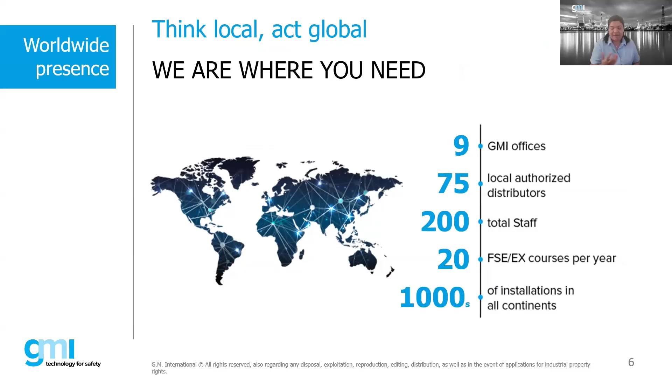On the next slide, we'll see that we're an Italian company, but we have global presence. So like Bob was mentioning, I work in the Houston office, GMI Houston, which is the headquarters for the Americas, and we have several offices as well in Asia, in the Middle East, and of course Europe, and we partner with our distributor partners such as Bob today.

Something that I find very interesting on the GMI products is all of them are being manufactured in Italy, and it is a state of the art production facility. And every single product that GMI manufactures is being tested completely before it leaves the facility. That allows us to provide you, the user, a 5-year warranty. That's something I find very interesting in the market nowadays. So we have that 5-year warranty for you guys.

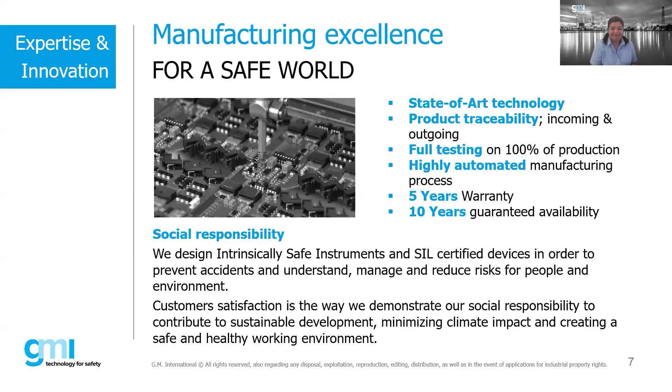As I mentioned, we are an Italian company, so we're a European company. So all our products will be ATEX and IECEx from the get-go, but we have global presence. So we also carry the North American approvals, such as UL, FM. We also carry Chinese approvals, PESO from India, Inmetro for Brazil, and of course TUV for functional safety, and many of our products will be DNV for marine applications.

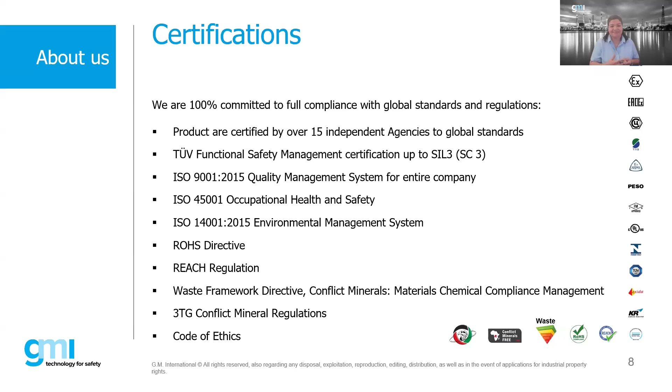Yes, and this will be the range of our products. So like I mentioned, intrinsically safe isolators, SIL 3 safety relays, SIL 3 signal conditioners, SIL 3 power supplies, I/O multiplexers, termination boards which have the connector ready for that DCS card, SIL 3 HART multiplexers, and intrinsically safe surge protectors, and our X1 series, which is a compact solution that provides also intrinsic safety or functional safety SIL 3 relays with the built-in connector for that DCS integration.

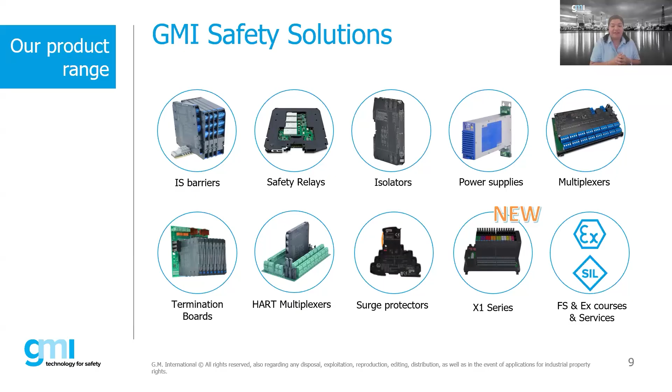We have a global range of customers going from system vendors, many EPCs, a lot of OEMs with global presence, and many end users. And we hope that soon we can collaborate with you guys, all our attendees joining today.

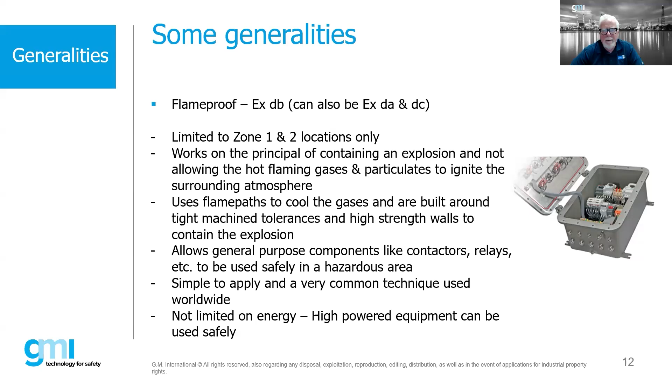But generally, zone one, zone two. Some advantages of flameproof: it's fairly simple to apply, and we can make almost any electrical component suitable for hazardous locations. It has robust construction, which could mean it's big and heavy - that could be an advantage or a disadvantage. It can be cost effective depending on the product involved.

Now there are some downsides of flameproof. As much as it's widely used, there are some negative things. One of the big issues is maintenance, with regards to things like bolts. If they do not get retightened or maintained, or they get lost, then all of a sudden our whole protection concept goes away because we have no protection if covers are loose.

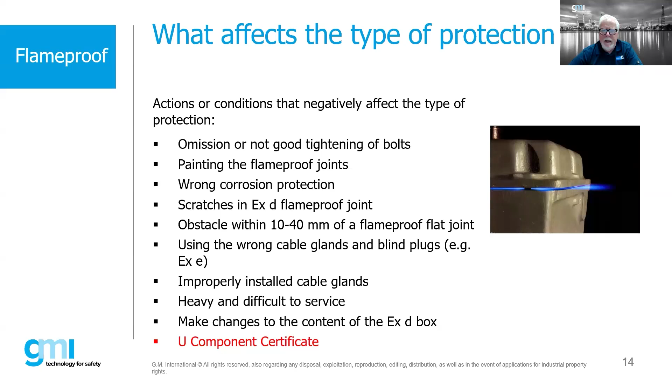If you look at some of these pictures, they can be large, heavy, very expensive. They're not necessarily the best from a corrosion resistant standpoint. If we have cast aluminum, sometimes this holds up very well, but in many cases maybe it won't. We may require the need for sealing or barrier glands, and it does require a good understanding by the maintenance team to replace and tighten bolts, relubricate threads or flange surfaces. It can also be limited for the gas groups in which you're actually putting this into.

We have a question on the chat - I think it's good timing for this one. On flameproof, is there specific nuts or bolts that need to be used, or could they be replaced with any standard bolts and nuts?

Yeah, that's a great question, and it comes up all the time. The best thing to do is check with the manufacturer. Most manufacturers will say, my bolt is an A4 stainless bolt, metric M8, or something like that. Generally speaking, as long as you're using the same material, same thread type, something with the exact same specifications, that is acceptable. I don't want to say that's acceptable across the board, but generally speaking, and we deal with a lot of different flameproof enclosure manufacturers, most of them will have that type of statement.

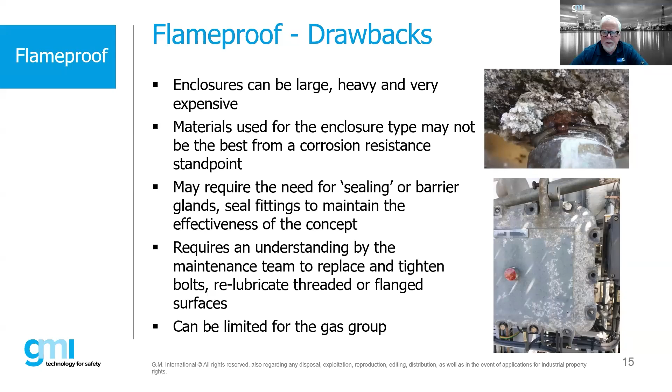Let's see if we can do this next one. So some of the other things you see with flameproof equipment - it actually does not require to be IP rated or have an ingress protection rating. So flameproof equipment can leak.

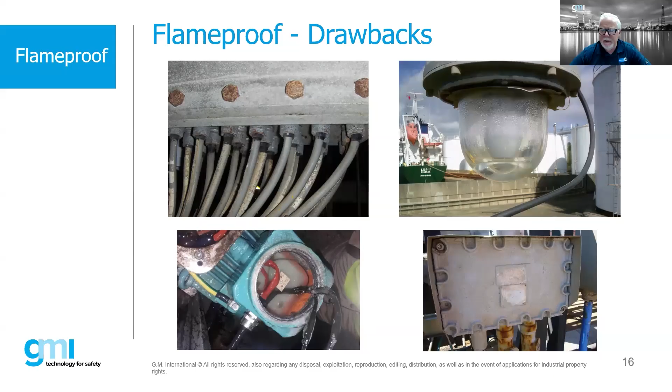Well, now we've obstructed that flange. So now we're in violation of making sure we keep a 10 to 40 mil distance between any solid obstruction and the enclosure itself. That's a dangerous situation. Obviously, missing bolts and all that is another issue too. But in the case of the light fitting, you do see some water collecting on the inside. So these are all kind of the drawbacks you see typically with flame-proof equipment.

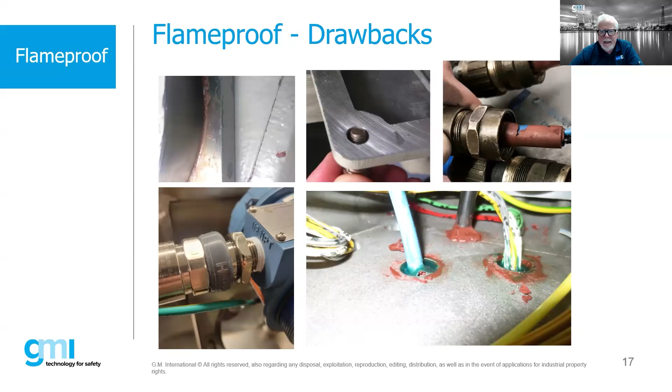Now, some generalities about intrinsic safety. Intrinsic safety is considered to be the safest protection concept out there. It's really one of only two protection concepts allowed for zone 0 - the other one is encapsulation, MA. It's been around for many years, just like flameproof, and it originally came out of the mining industry for signaling bells, where they limited the amount of energy for signaling to miners in the mines by the use of intrinsically safe barriers.

It works on the principle of limiting the energy into the hazardous area. Now, it is a system concept. This involves the use of an intrinsically safe barrier, or what we might call an associated apparatus, in conjunction with the end device and the interconnecting cables and enclosures. So this is where it gets a little more interesting, because it is a system concept, and we have to take that into account when using intrinsic safety.

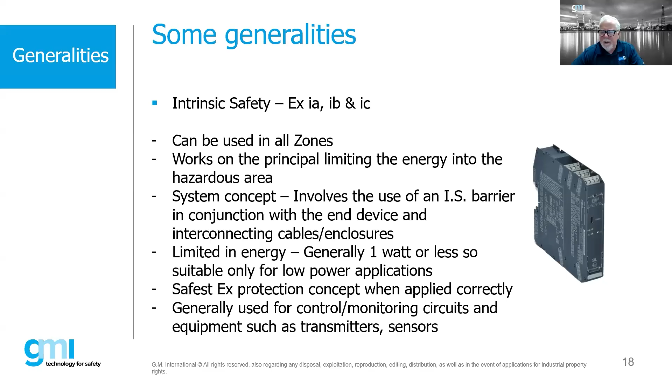Excuse me, I'm getting over a cold, I apologize. One of the other things about intrinsic safety - it is limited in energy, generally 1 watt or less. So it's suitable for low power applications. Every now and then I'll see people asking for an intrinsically safe motor starter, or an intrinsically safe circuit breaker panel - you just can't do that, right? It's generally low power, so a lot of our signals are 4 to 20 milliamp control signals. Certainly we can make those intrinsically safe, but a lot of other things we just cannot. Again, it's typically used for control and monitoring circuits and equipment, such as transmitters and sensors.

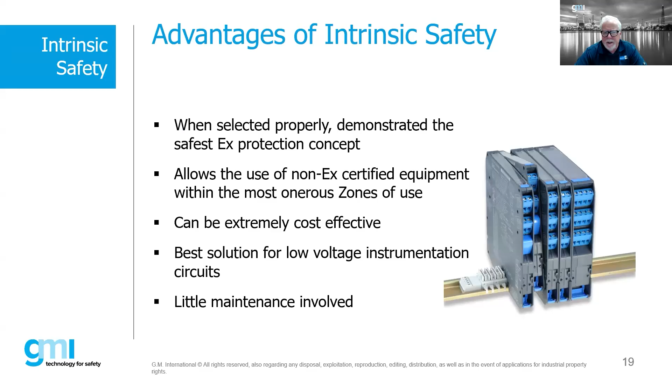When it is selected properly, intrinsic safety is demonstrated to be the safest EX protection concept. One of the big benefits is it allows the use of non-EX certified equipment within the most onerous zone of use. It can be cost effective, and it's generally the best solution for low voltage instrumentation circuits, with little maintenance involved.

So some of the drawbacks: we need to match the barrier to the device, which takes into account engineering. We need to consider the capacitance and inductance of the overall circuit, including the cable - this is one thing people sometimes forget. We have to account for the field device and associated apparatus, but also the cabling itself, and again the separation. We really cannot repair intrinsically safe barrier units - once they fail, they basically get disposed.

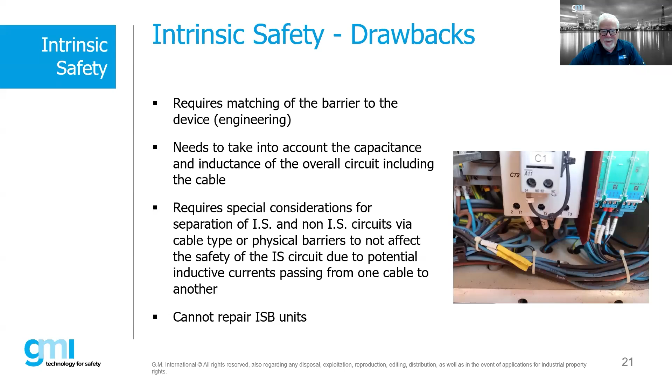However, in the case of GMI, they have a 5-year warranty. So if they fail within 5 years, then GMI will replace them. Absolutely.

So here's an example of bypassing barriers. We have some barriers, and what probably happened is maybe the fuse blew on these barriers. And of course, if the fuse blows, then there's no signal. The guys in the field need to go ahead and get this running. What do they do? They just bypass it. And at that point, we've created a very dangerous situation because we have no protection in a potential hazardous area.

What you see on the right-hand side is bundling between IS and non-IS. We could have a situation where inductive currents - capacitance or inductance - are induced into the intrinsically safe circuits. This is something we really have to be very careful about.

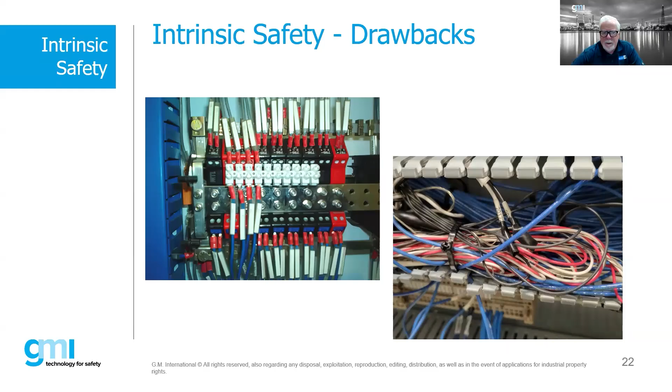But if they don't pass, then we can go back to the drawing board. We are creating a system, an intrinsically safe system - you have your intrinsically safe field device, your intrinsically safe isolator barrier or Zener barrier, and the wire in between, which is part of this calculation to create this system that will be installed. Some calculation needs to be done to make sure your system will have this energy limitation, and it will allow you some of the great advantages of maintenance for the intrinsic safety system.

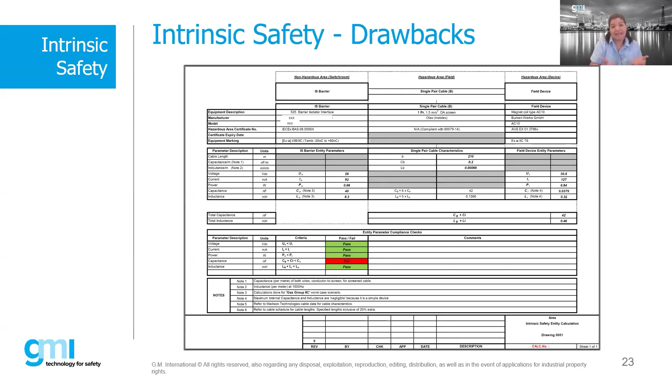And I think also for maintenance, right? Like a plant that has been running with IS for 20 years, maybe they need to replace that IS device, and that device doesn't exist anymore. So now they reach out to different manufacturers. Well, this information allows us to provide a safe recommendation on what to put in place.

Absolutely, yeah, because obviously manufacturers discontinue products. Again, as an inspector on an ongoing project, what I'm going to be looking at when I'm an inspector looking at intrinsically safe systems, I want to see this information and then I want to go validate. I'm not going to double check all the numbers, but I am going to say, hey, does that equipment that's out there match what's actually on this? Is the field device, in this case, that particular brand of product? Is this the particular associated apparatus? Is that all correct? So if we decide we can't get this product anymore and we want to modify it or change it, then that's okay.

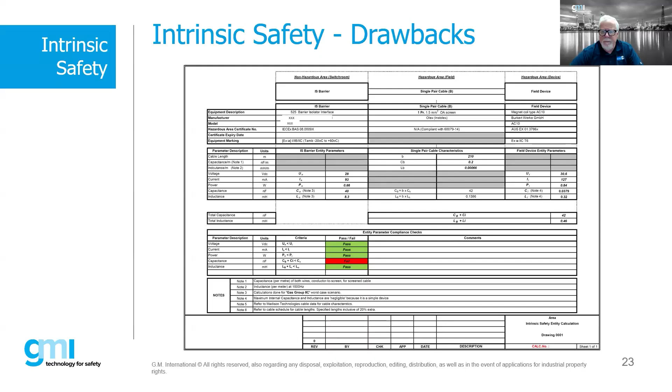Then all we need to do is just update our DSD and we go on down the road. So this should be a living, breathing document that stays with that intrinsically safe loop for the life of the installation. Could be 30, 40 years. So it's something that is important to have, where this is how we validate that intrinsically safe installation.

And we have a question from our attendees.

It says, for design teams, it's a bit challenging to select the right type of IS barrier and get the information to be added. For this, manufacturers like GMI and many others, we want to partner with you to help on the safe selection of these devices. So you just reach out to us, reach out to partners like Source IEX, distributor partners for this type of applications, and that's what we like doing, right? Give us the application, and then we can work together to see which product makes more sense for the application.

Because just like the attendee was saying, there are several different barriers. Which one do you select? There might be five different options that will work, but it really depends on the application, on what you want to achieve, that will help us guide you towards one versus the other. So definitely partner with us, partner with IS specialists for that type of support.

Yeah, absolutely. And it can get confusing. A lot of times what manufacturers of end devices do, if you look in a Rosemount catalog or something like that, and you look at their installation operation manual, in the very back they'll actually give you a specific brand or manufacturer. That doesn't mean you couldn't use another brand or manufacturer. It just means they've done the research to do some calculations and said, hey, if you use this brand, this manufacturer's product, this one will work. If you use this one, so forth and so on. A lot of times that's pretty common.

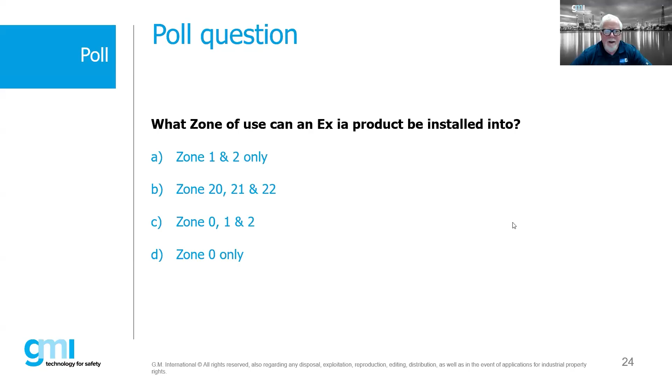So was it C? It was zone 0, 1, and 2? That was the most correct answer. And zone 1 and 2 is correct. Zone 20, 21, and 22 are dust hazards - intrinsic safety can be used in those, it's just not as common. So really the only one that's wrong is the fourth one, zone 0 only, because if a protection concept is suitable for the most onerous zone, by default it's good for lesser zones as well. So in that case, the correct answer would be C.

I would have put C and B if I was allowed to do two options. No worries. So what standards provide the guidance for the use of flameproof or intrinsic safety?

So the installation design standard for those in the IEC world is within the Dash 14 standard. Complex IS circuits are located in the Dash 25 standard. Within the US, we follow the NFPA 70, commonly referred to as the National Electric Code, and that's all in Article 504. In Canada, we follow the CSA C22.1 Part 1, Section 18.

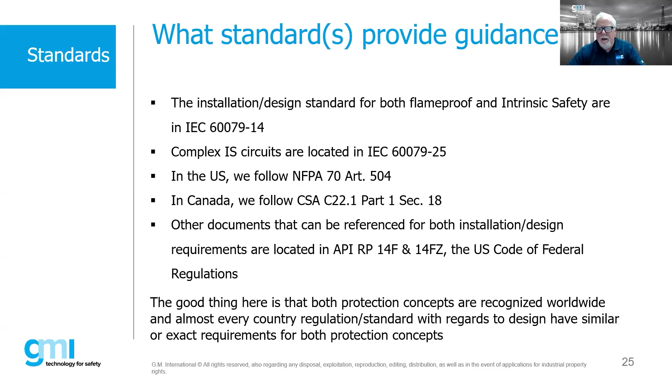There are also other documents you can find for installation design, such as American Petroleum Institute recommended practices, or the US Code of Federal Regulations, or some of the other international standards out there. The good thing is that both of these protection concepts are pretty much recognized worldwide, and almost every country's regulation with regards to design has similar or exact requirements for these two protection concepts. So if you're familiar with intrinsic safety in Europe and you want to apply it in, say, Latin America, guess what - it's pretty much the same. We want to do it in the United States - well, we're slightly different because we have the division concept, but if we use the zone concept, then it's pretty much the same. Almost everywhere else in the world, the concepts for flameproof and intrinsic safety are very, very similar no matter where you go.

And we see that a lot with our OEM customers, right? Taking advantage of that one design they can utilize in pretty much any part of the world because they can triple certify it, or quad certify an assembly.

So really then it boils down to, okay, well what about the cost of ownership? And of course there's the financial outlay. Again, there are certain applications where we can only use flameproof, certain applications where intrinsic safety makes sense, and certain applications where we can do either one.

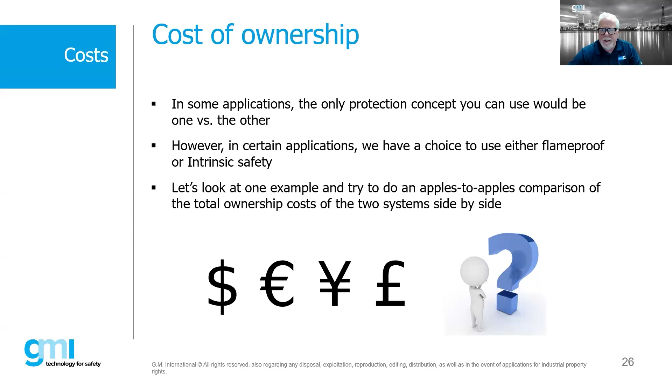So just picking out a simple example here, looking at the cost of doing, say, a transmitter. In this case, we've got a flameproof transmitter - let's just say this transmitter is $400. It's probably a lot more, but if we use $400 as a basis in US dollars, then generally we might have to use a barrier gland, possibly not. A barrier gland is a compound type gland. Depending on the cable type, the cable length, and where we are in the world, we may not need to use a barrier gland.

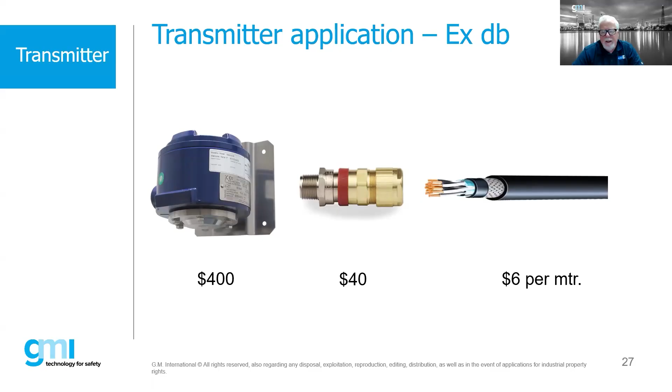But if we just assume we do, we're going to use, say, an armored cable, a braided marine type cable, or maybe a steel wired armor cable. This is kind of what we'd be expecting for the cost of a traditional flameproof type installation. Now, if we do the exact same thing but instead of flameproof, we do this as intrinsic safety...

Well, again, the transmitter is going to be basically the same cost. Really, the difference in cost now is going to be with the gland, the cable, and certainly the associated apparatus. So depending on the length of cable, depending on how many loops there are, this can be a fairly cost-effective solution, but it really just depends on how many loops you have and how much cable. Cable is going to probably be the major factor why one installation could be less expensive than the other.

Because when we start running with IS cables, now all of a sudden the cable requirements may not require us to use an armored cable. And then even in many cases, the glands that we use for intrinsic safety, in some cases, they don't even need to be certified. So there can be some significant cost savings in going with an intrinsically safe installation versus flameproof.

And what makes it interesting is that you will find that manufacturers now are making a lot of their devices, such as transmitters, marked both for EXD and for EXI. So you have the choice—it's up to you how you want to install this. And it's really important too to make sure that if you're doing it one way or another, the people doing the installation understand how you're doing it.

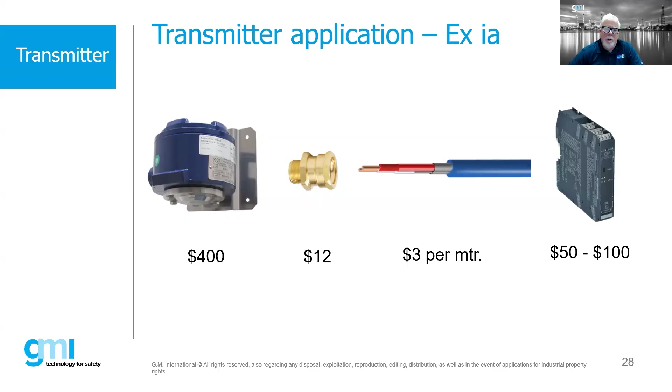So again, material cost for the transmitter is the same. Cables and cable gland would be generally less, but we need to include the cost of the ISB. Generally, the longer the cable run, the more cost effective it can be.

Maintenance cost: all EX installations shall be inspected once every 3 years. Flameproof may require de-isolation before opening enclosure if a full detailed inspection is required. IS loops can be worked on while energized. However, that being said, many plants and organizations do not allow IS to be worked on while energized, but the standards generally do allow you to do that.

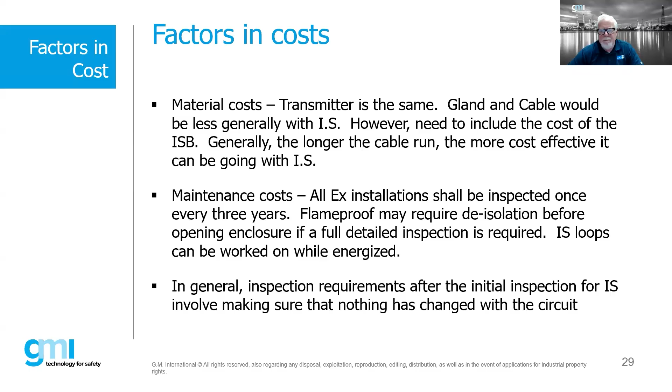So the key thing on intrinsic safety is that after that initial detailed inspection is done, if it has been done and everything has been selected correctly, the only real inspection we're doing is making sure that nothing has changed. That's really the key thing—making sure the environment is not degrading, say, the cable, the transmitter, or whatever it is. So generally speaking, from a maintenance and inspection standpoint on intrinsic safety, it's a fairly simple, quick process, just making sure it matches what was originally done.

I think we have another poll question here, Barb. Yes, we see it. Intrinsic. I see, let me find it here.

While you're doing that, we had a question regarding EXD cable glands: is it correct to use a barrier gland until 3 meters of cable distance? Beyond 3 meters, can I use a normal armored or non-armored cable gland, for example?

Yes, to an extent, yes. The edition of IEC 60079-14 from 2013 had this 3 meter rule, where basically going into a flameproof box, if the cable was circular, compact, had extruded bedding, and would basically not allow gases or vapors to travel in between the cores, then we could avoid using a barrier gland if the cable run was longer than 3 meters.

Now, that standard has just recently changed and it's been introduced, I think it was October of this year or last year, as Edition 6. And that 3 meter rule has changed. So we'll probably talk about that sometime in one of these webinars, but there's a new cable gland selection chart for EXD, or actually primarily for barrier glands where you need to use barrier glands, and it's not the 3 meter rule anymore.

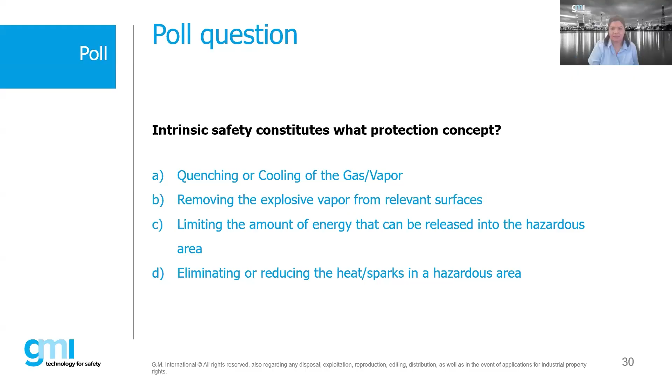Good, okay, so our attendee has responded. I think they did pretty good. Limiting the amount of energy that can be released - there you go. Yeah, so quenching or cooling of the gas vapor, that's flame proof. Removing the explosive vapor from relevant surface, that's a pressurization concept. Eliminating or reducing the heat or sparks in a hazardous area, that's considered to be increased safety. So limiting the amount of energy is the concept.

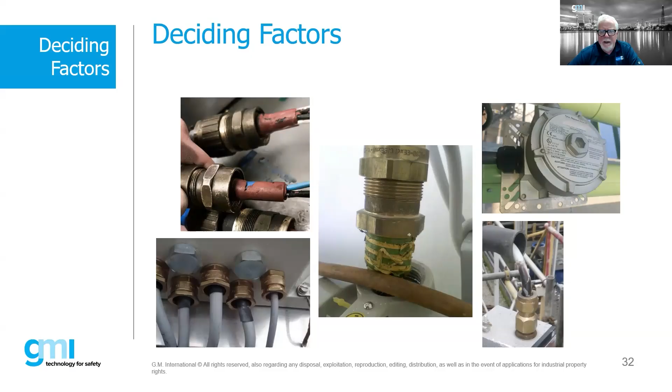So again, some of the deciding factors - cabling and cable glanding can be a big issue. I don't want to minimize - you don't always have to use barrier glands, so that's not necessarily always the case, but certainly glanding seems to be a big issue with regards to any EX installation, regardless of what it is. But glands are very, very important.

Again, each concept has its advantages and disadvantages, and sometimes the advantages of one versus the other is not so clear. Each installation situation is different. It depends on the labor force and the skill of the operator, technician, and designer, because it can make a big difference of whether or not that protection concept makes sense.

One of the things - I'm working with a customer right now that's doing a project in the Middle East, and they're going to use intrinsic safety for the first time. The good thing was, from their design, a lot of their equipment were considered to be simple devices, sensors. And because they're simple devices, not energy storing, their installation and design of their packaged equipment more or less doesn't have to change, because with simple equipment with intrinsic safety, we do not necessarily have to have certified pieces of equipment - we can use general purpose equipment with intrinsic safety. So that's a big factor for them, where their design for the most part doesn't really have to change dramatically, the parts and pieces and everything else.

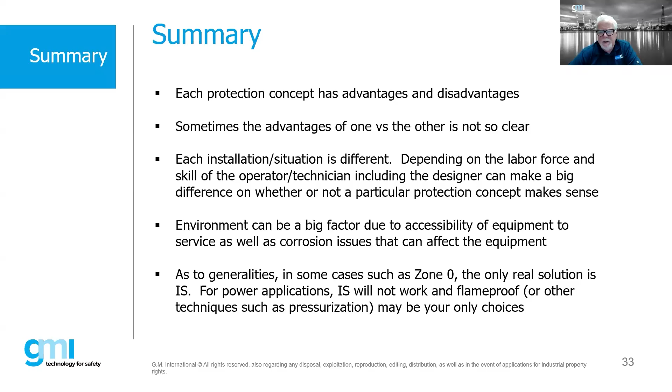So again, for some generalities, such as Zone Zero, the only real solution is intrinsic safety. And again, for power installations, IS won't work, and flameproof or pressurization or some of the other techniques may be the only choices.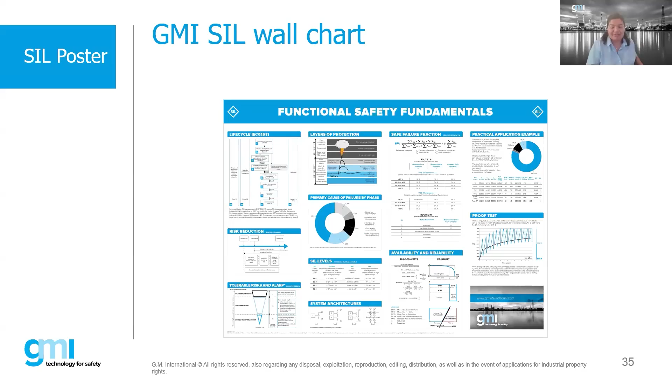Now don't leave, we're not done yet. Well, of course you can leave, but we did want to at least address some of the questions that you have brought to us.

First question: must the equipment and barriers be certified as intrinsically safe by the regulators? Yes, for the most part. However, the barriers and some of the final end devices must be certified as intrinsically safe. This is important to know: a barrier itself, the associated apparatus, is not intrinsically safe, but the output is.

So the field device may or may not need certification as being suitable for EX applications. If it is a simple device, basically a non-energy storing device such as a switch or an RTD, that device would not require EX certification. In those instances we can use general purpose equipment, including in some cases the wiring methods we'd employ for a non-hazardous application when using intrinsic safety. That's probably one of the biggest advantages of intrinsic safety: with simple, non-energy storing devices, we can follow almost the exact same installation as a general industrial application, even in the most onerous hazardous location application. That's a very big benefit.

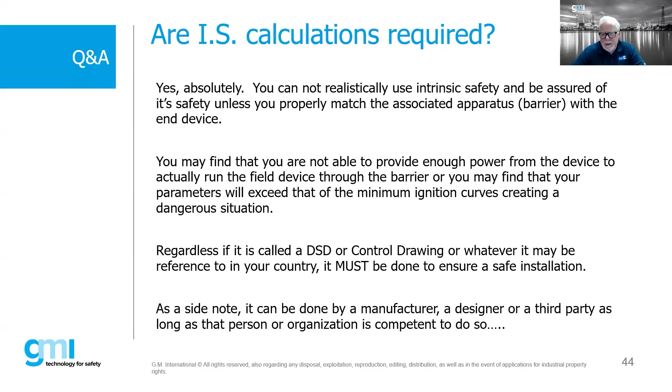Regardless if it's called a DSD or control drawing or whatever it may be referenced as in your country, it must be done. It can be done by a manufacturer, a designer, or a third party, as long as that person or organization is qualified to do so. It shall be done, it has to be done. How it's done is typically left up to country-specific regulations, but it does need to be calculated.

What are some key differences between countries and regions with regard to IS and flameproof? For the most part, countries follow the 60079 standard. In Europe they follow the EN versions, in the US we follow the UL versions, and in various other parts of the world they'll have a variation of the 60079 standards. The 11 standard is the intrinsic safety standard, 14 is the design and installation standard which includes intrinsic safety, and 25 is the standard for complex intrinsically safe circuits. Those three standards are where we go to find all the details regarding intrinsic safety. The same applies to flameproof.

For the most part in the world we follow the 60079-1 standard. In the US, however, we have a concept called explosion proof, which requires a higher pressure testing than flameproof. So there is a difference between explosion proof and flameproof, but the concept is the same, if you will.

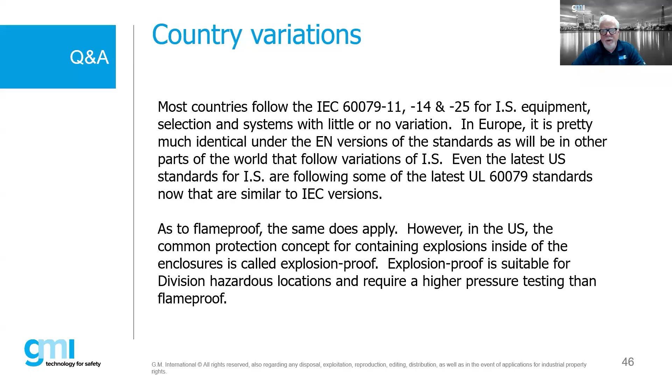What's the biggest issue with IS? Well, all the other protection concepts recognized in the IEC world are pretty much standalone. But IS, as we mentioned, is a true system concept which requires engineering taking into effect the end device. And it can be defeated in the field by bypassing the associated apparatus.

Since some people don't understand it, fortunately it isn't touched, which in some cases is an advantage. People think, okay, flameproof, I can just get in there and open it up and tear it all apart, and then they think they understand it. Intrinsic safety, people don't understand it, so they don't want to touch it. It's kind of like black magic, so to speak. I don't know if that's an advantage or a disadvantage, but that seems to be the case.

I notice that if a barrier blows, with a Zener diode or a fuse blowing or something like that, they just don't want to touch it. They just replace it and then leave it alone.

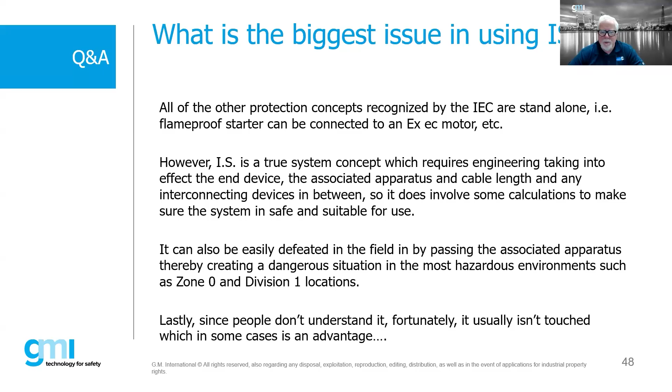So where does it outperform flameproof in real world use, especially for OPEX and maintenance? Also, how does it impact PLC design, high power limits, and HART communication? That's a good question, right? The OPEX, or operational cost of maintaining the system, can be significantly less than using traditional flameproof systems. Flameproof can be easily compromised by the environment, such as corrosion, poor maintenance processes, lack of knowledge, or replacing or tightening bolts and other factors.

Generally, IS systems, when properly designed and selected, are not subjected to the same inspection requirements and maintenance procedures that you might find with flameproof equipment. One of the big benefits of IS systems is we can do our inspections and maintenance without de-energizing the circuit. Also, the materials we use for intrinsic safety can include different corrosion resistant materials, where flameproof equipment may be limited to cast metal, which in some cases, depending on the environment, could be a negative since corrosion could affect its long life.

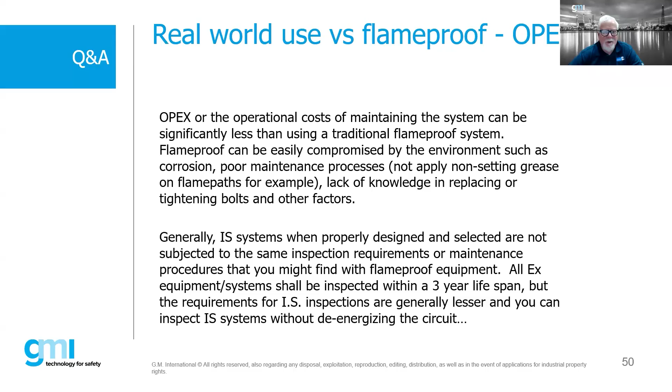I've seen a product marked with a slash in the marking string. This isn't something we see too often, but here's an example: a piece of Ex equipment could actually be located in two different EPLs or zones. We could have a zone zero where the sensor is located, and the electronic compartment located in a zone one. The marking would read Ex ia IIC T6 Ga slash Ex db IIC T6 Gb, incorporating two different protection concepts in a single unit, with half installed in a zone zero and the other half installed in a zone one. It's a little unique, but it's out there, not completely unused.

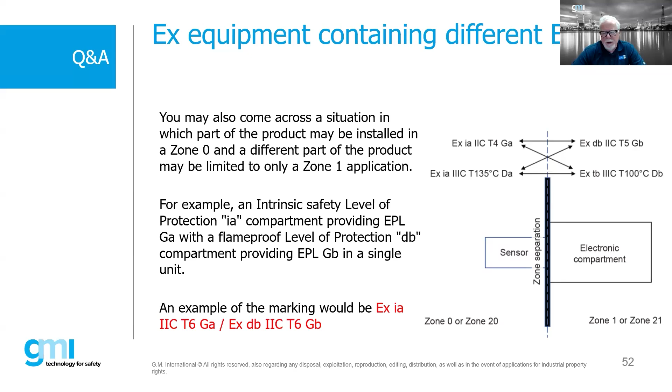Manufacturers designing equipment for hazardous locations now optimize by mixing protection methods, making it easier to install and maintain. We're seeing more of this type of single item utilizing different protection methods, like one housing that could be installed as EXD, EXI, or EXN. This makes it more important than ever for individuals responsible for system design to truly understand how the product will be used, and to share that information so the appropriate wiring methods, glands, and cables are selected. It used to be fairly simple, but now manufacturers make one product usable anywhere, putting more onus on operators to make the proper selection. People in the Ex field need to step up their game as manufacturers try to make one product fit everything.

For IS installations, what cable glands do you recommend? Without naming brands, this is out of the latest standard, the Dash 14 from 2024, table 15. For EXD we have to use an EXD gland. For EXI, we can use an EXD gland, an EXE gland, or an EXN gland, and in some cases we can even use a non-certified gland. So for intrinsic safety, we have a lot more flexibility in the type of cable gland we can use. In many cases people can use plastic EXE glands, or they could use brass.

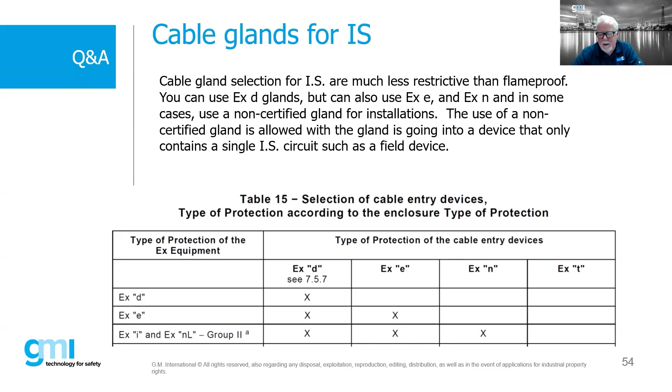The requirements are not as rigid, because an EXD gland has to be able to withstand an internal explosion, where an EXI gland does not. By the way, there really isn't such an animal as an EXI gland. There are cable glands marked blue, but generally speaking, they're really not EXI, they're actually EXE. Although some manufacturers have gone to the extent of getting their cable glands EXI, in reality they're actually just EXE glands that are colored blue.

And again, that's one of the great advantages of doing the intrinsically safe system, because the cable is part of the entire system. You have that IS loop, and that's why you have this flexibility on the material you can use, like the cable glands and the actual cable.

Yeah, mhm, I think this is the last one. I'm not sure, I know we're kind of at the end here. I have a linear heat detector.

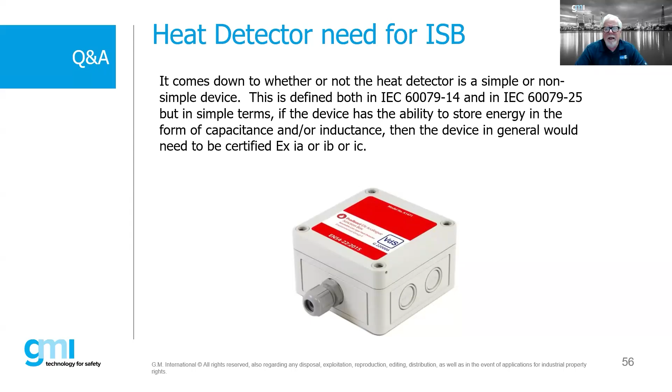If this is installed with an intrinsically safe barrier, does the heat detector need certification? Well, it really just comes down to whether the heat detector is a simple or non-simple device. It's defined in the Dash 14 or 25, but generally, in simple terms, if the device has the ability to store energy in the form of capacitance and/or inductance, then yes, this heat detector would need to be certified as intrinsically safe. So if it has a printed circuit board on the inside, chances are it would need to be certified.

Oh boy, this is another one. What are the biggest misconceptions about IS mistakes you have encountered?

Just to briefly go through this, one of the things I always find when I see intrinsically safe installations - I was doing an inspection last month and came across an intrinsically safe installation. The first thing I asked was, can I see your descriptive system documents? And they looked at me like I was from Mars. I said, well, this is what it is, and I need this. In many cases, people do not actually have that. So it's something I do, and I'll generate that for them. But generally, that would be something we would ask for. Hopefully, anytime you're doing intrinsically safe, you've generated those DSDs.

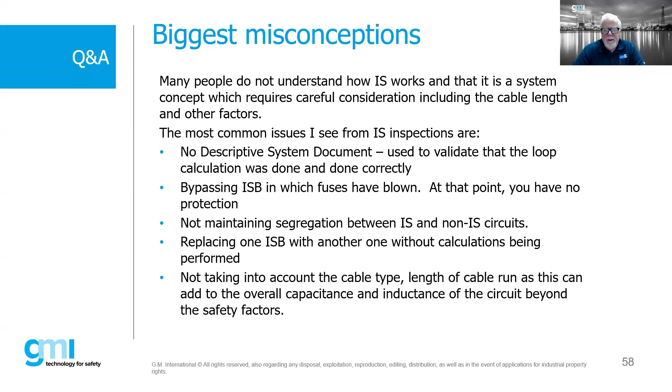Bypassing the ISBs in which the fuses are blown, that's pretty common. Not maintaining segregation between IS and non-IS circuits, replacing one with another without doing those calculations, and not taking into account the cable type and length of the cable run, which can add to the overall capacitance and inductance of the circuit beyond the safety factors. Those are probably the biggest issues I see with regards to intrinsic safety.

I think I made it. Oh, yes, yes. So thank you, Bob.